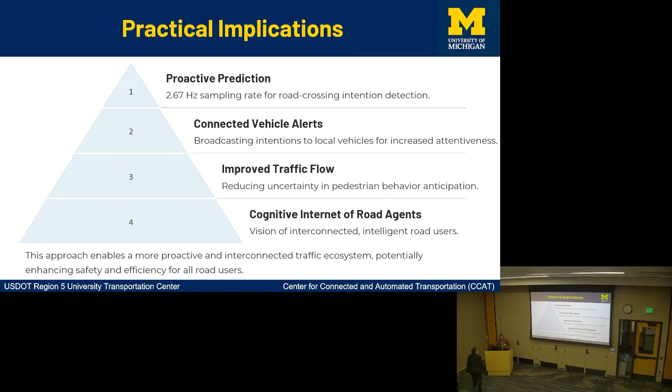You may have noticed that the title listed here is different from what's showing on the program there. That's a mistake when we reported the presentation title. However, the main thrust of the contents is still related to control strategy and the algorithm and everything. So this will hopefully serve the same purpose. And now the topic is junction of offset intersections. How do you centralize the control?

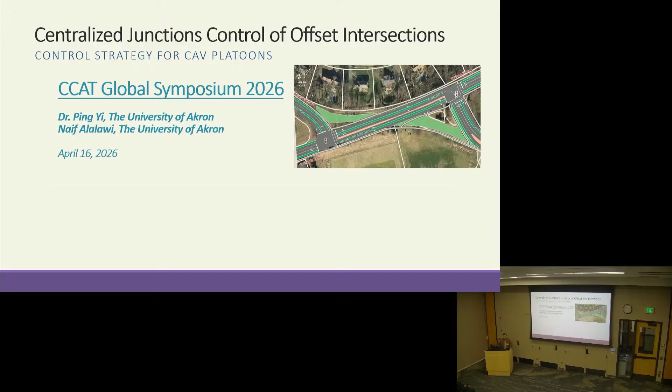That's why in this research, it's a small-scale research. Our objective is to study the feasibility when we have autonomous vehicles. And how do we handle the traffic problems and hopefully improve not only the efficiency but also the safety. All right, let's get to the details.

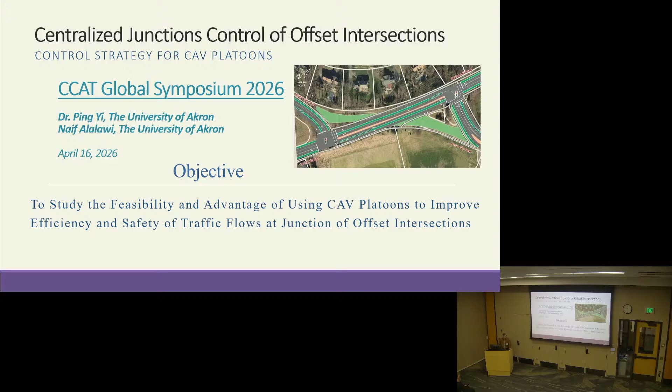Now again, offset intersections we all understand, but when you have several of them with different OD patterns, especially when the OD patterns involve some turning movements rather than just going through, it can be a really big challenge for signal engineers, and it will require probably multiple controllers and how to coordinate. But once there's anything going on, the OD pattern changes. It's always a struggle to go through, with delay and accidents and everything.

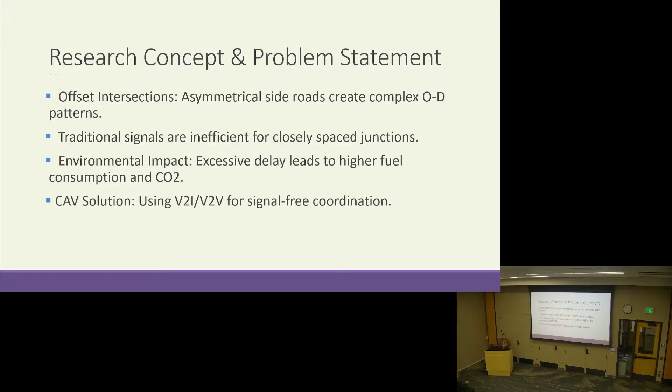In addition to the environmental impact listed here. And so the thinking is, we have autonomous vehicles where we have communications between vehicles and the infrastructure. We may be able to have the traffic flows guided through, even without using the signals. So that is the thinking. Now, getting into a little more on the problems.

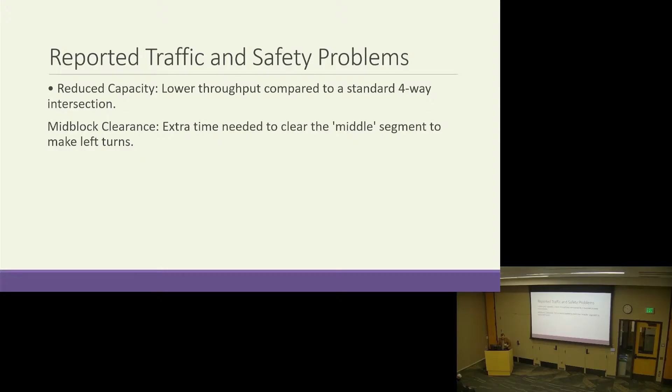Most cases, I can say most cases, we have a problem with capacity at these kinds of locations. And especially if you're involving a lot of turnings, we have another picture to show you that. When you are waiting in the midblock, making a left turn, cutting through the opposing traffic, there's always a challenge there. Now, that's on the operation, but for the safety part, gap acceptance.

If you're using stop sign control, definitely there's the efficiency problem. But if you signalize all the intersections, I would say 4 or 5 T intersections, and they're all offset, it's hard to do the coordination. And even for gap acceptance for vehicles coming out making turns, you have to have a signal to protect. Otherwise, you could have problems.

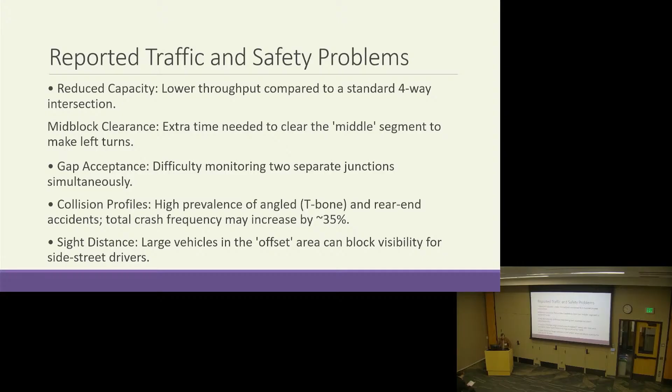And so collisions in this area are reported increased by 35%. Rear ends, because of stop and go and stopping suddenly, and also right angle accidents. And when you have larger vehicles, the sight distance is poor, it's blocked. So those are the problems, and we're thinking that if we use autonomous vehicles, maybe we can have a guided traffic flow, then we can avoid all those problems.

So the methodology is we can use the communication capabilities to receive the OD information, the platoon size, like length, and also the approaching speed. And then, before they even join the system, or a junction we call it, intersections, we can adjust the speeds. So assign a certain speed for them to go that will avoid the conflicts.

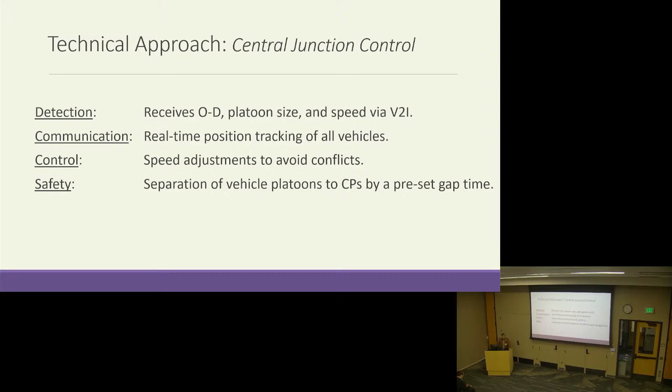And possibly, through those conflict points, CP means conflict points, by a safety gap set, we can avoid the conflict, and then possibly we do not have to use signal control, and they just follow the instructions and go through. So mainly that is the whole guideline. Again, this is a small research effort, but we're trying to develop a methodology for that so that if it's feasible, that'll be good feedback.

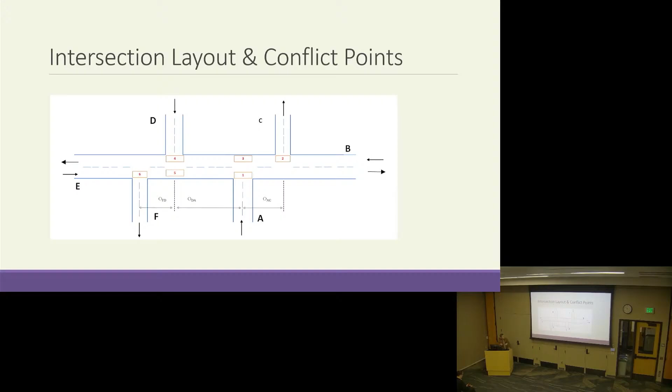So if you come in from a side, you can go out there, go out here, go out here, go out here. So you can have multiple. So in total you have 14 OD pairs, and especially with turnings involved, when you have a lot of traffic there, it can really create problems.

So the last line in this slide says that every platoon coming into the system will go through at least one conflict point, and at most can go through 4 conflict points. So that's where the complication is. That's why we have a lot of traffic operation and safety problems.

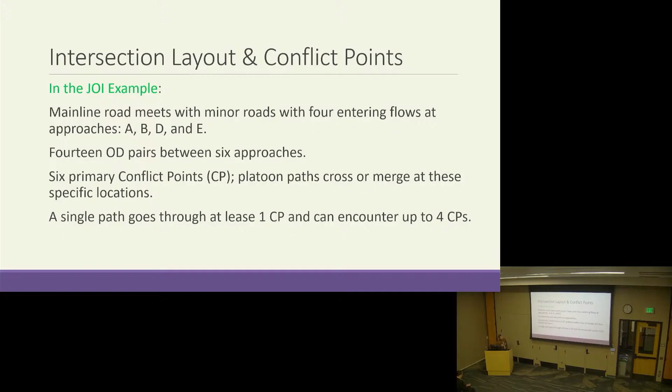Now this one shows the simple methodology, the interference matrix. For example, if a platoon is coming from A, let's go this way. If the platoon is coming from A going out B, then definitely you go through conflict point 1. But if you're coming from A going to F, then you have conflict point 1, conflict point 3, conflict point 4, and also conflict point 6. So you have 4 conflict points.

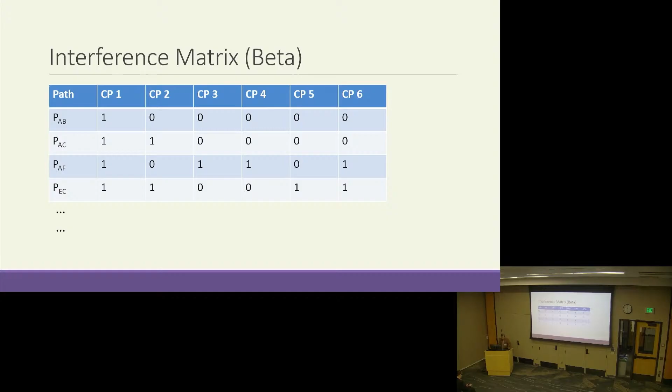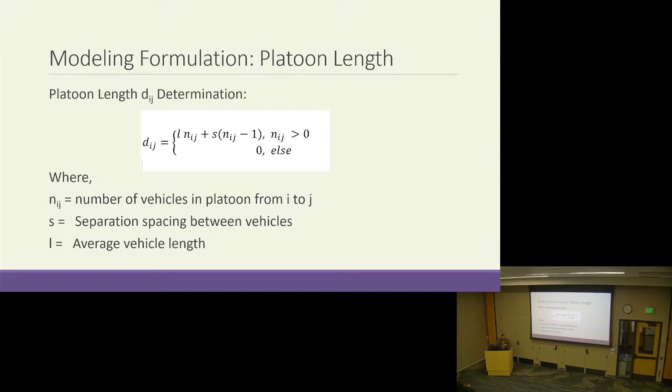We have so many pairs coming in; I'll just show you an example. That's what the interference matrix means. To start the modeling, we need to first decide the platoon length. You not only have the number of vehicles, but also the inter-vehicle spacing S to consider. We can consider the whole platoon as a whole body, so that no part of it will be in conflict with other platoons.

All right, so this is another simple one showing that if you're coming from A, this is the distance. If you come from A, you go to conflict 1, 2, 3, 4, and you can see this is the distance you have to go depending on where you're going. This distance covers not only the actual length from one intersection to another, but also the approaching distance.

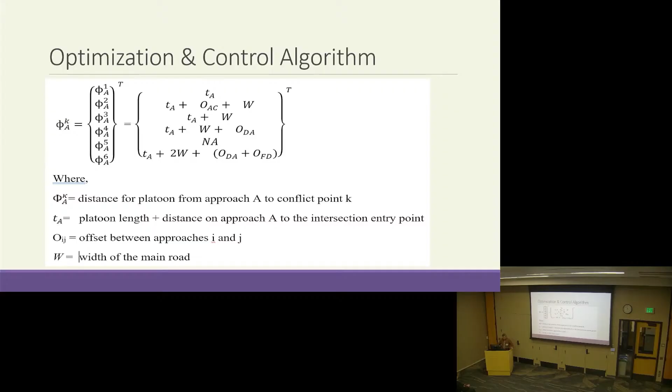When you're coming in, before you join, the system will know you, because through communication you report to the system how many vehicles there are, so the platoon length, but also how fast they're going, and all this information will be taken into account. This is just showing one coming from A, and then you have multiple. We're just using this for concept introduction.

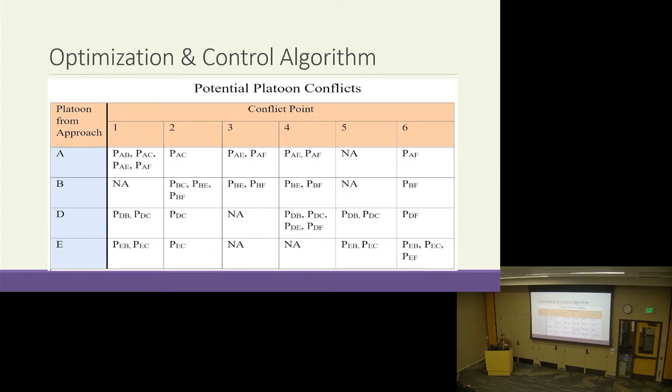This table shows the potential platoon conflicts. For example, you're coming from A, and at conflict point 1 you have potential conflict with those platoons, and at 3 you could have this. You could have a conflict with platoons coming from B, C, E, and so on. And if you're D, then this is where you possibly have a conflict. This information is very important when you develop the solution strategies, so you know where to look at as the system base.

The methodology is very simple: we try to avoid conflict. If you have 2 platoons coming to a conflict point K, one going from I to J and another going from M to N, we want to make sure they are separated. It doesn't matter which one comes in first, so we have the absolute sign there. They have to be greater than a preset gap to enhance safety.

The whole objective is, by changing the speed of the platoons coming in, with the distance of travel, to make sure the arrival times of different platoons at the conflict points are separated by enough gap, so that everything can hopefully go through without stopping, even without signal regulation. So that's the concept. Then how do you tell whether your solution is good? The objective is to minimize the total system-wide travel time through the entire junction.

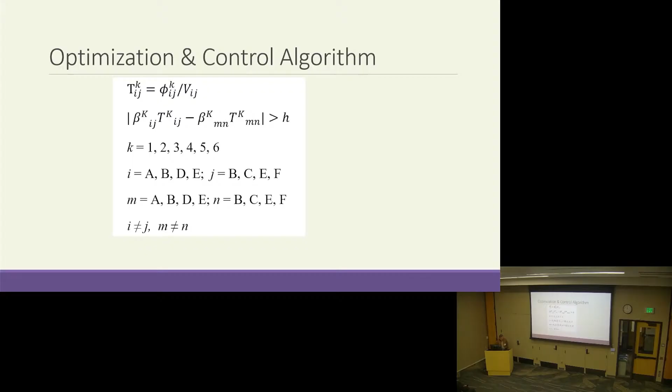So again, the objective is to minimize total system travel time, okay? Or you want to say delay, but do a comparison, you will find that. So the decision is for you to see the speed each platoon should take, so that we can avoid going into the same conflict points with other platoons.

And of course, in doing the work, you have to do the updates frequently, because new vehicles or platoons are coming in, while the old ones in the system will move out. So it's a continuum process. And then how do you validate whether your solution is good? Of course, on one hand, analytically, we try to get the system-wide travel time, and then we can verify in terms of the number of conflicts, because we can record that through the simulation.

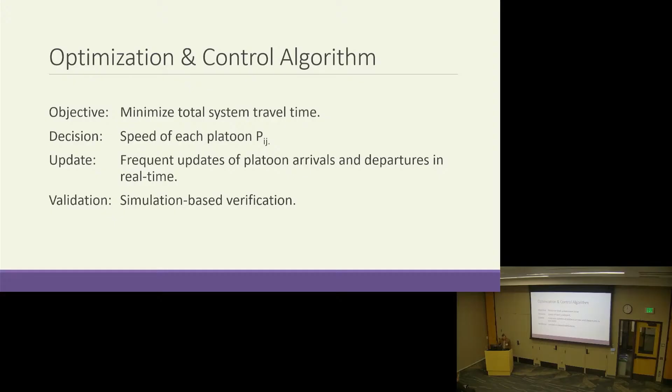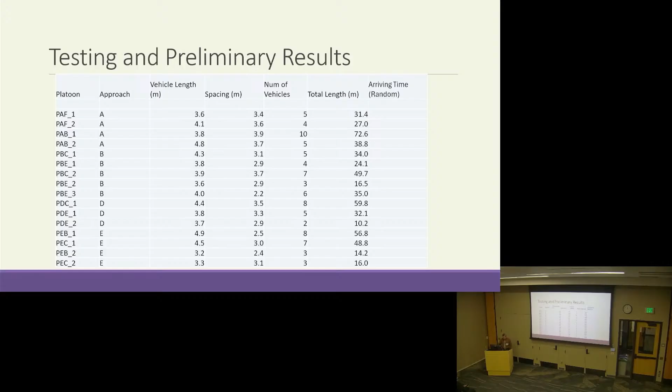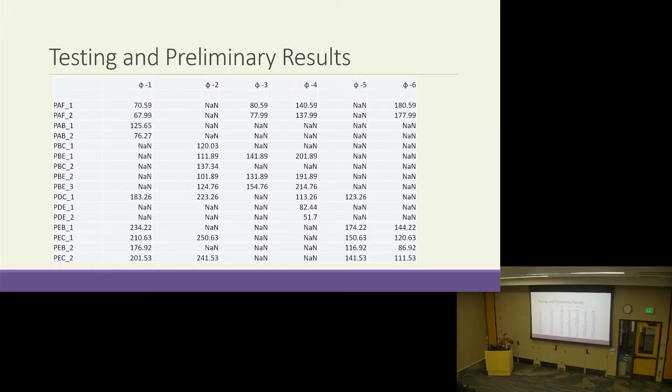But it depends on how soon you are able to communicate with the system, report to the system, your approaching distance. In other words, I'm coming from a side street or from a main line. Before I reach the system, I report to the system. So we do that also in a random fashion. Your platoon is not always picked up at the same point. Okay, so that's why you still have different distances for the platoons coming from the same place.

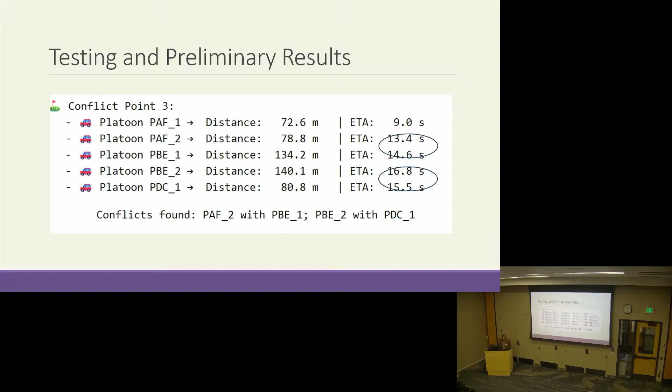For safety, we want them to be larger, right? Depending on how you determine this, if you want to make it really safe, 3 seconds or 2 seconds. In this case, we set it to 2 seconds. But obviously, you can see there's a problem with this. Okay, those two also. So then through modeling, which involves nonlinear programming, a mathematical process, and we haven't done the simulation part yet, you can see that the system is able to optimize.

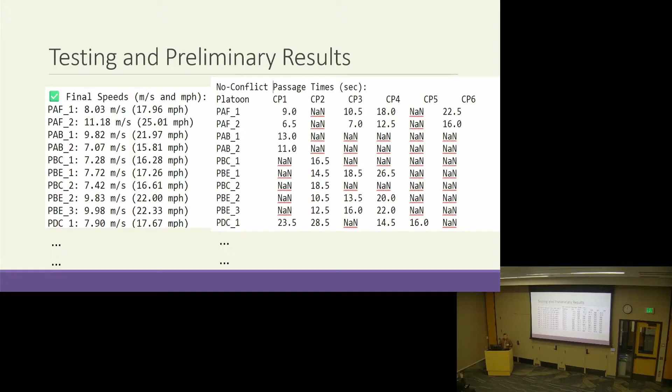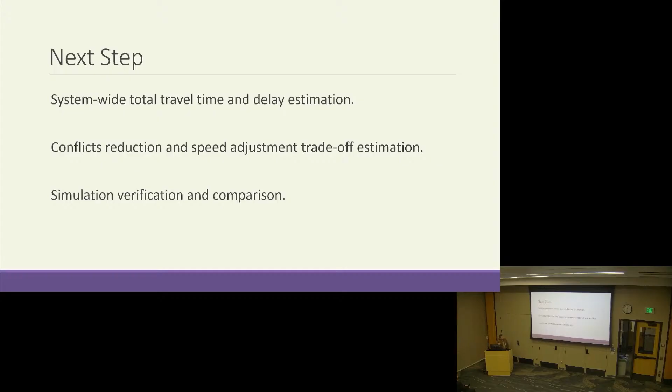But we understand some platoons will have to slow down a little bit, and some platoons are lucky to keep the same speed. So there is a trade-off, okay? But we will do more work on the simulation part. We'll find out, and of course, this is our next step.

And finally, I will just say that this work is meaningful. And again, this is a small research effort. But we're very happy to see that at least the formulation is well posed. What I mean by mathematically well posed is you have a solution and it's feasible. It doesn't take thousands or millions of dollars to get at it. So it's a very simple process.

And the results are promising, supporting that possibly in the future, in a signal-free environment, you can get this worked out, efficient, and avoid conflicts and everything. So this is a preliminary finding. And of course, we'll do more work, and especially simulation will confirm a lot of things we said here.